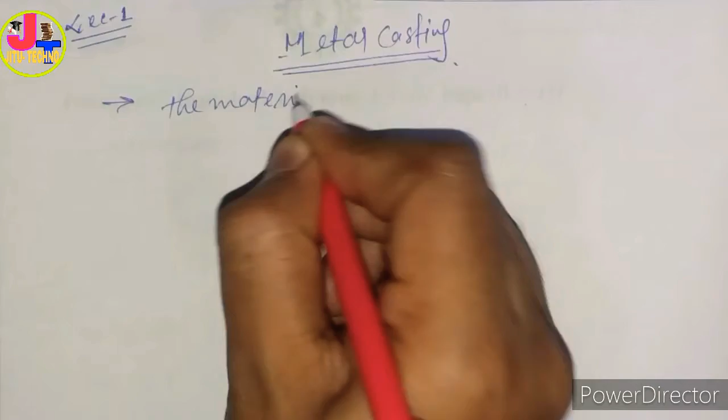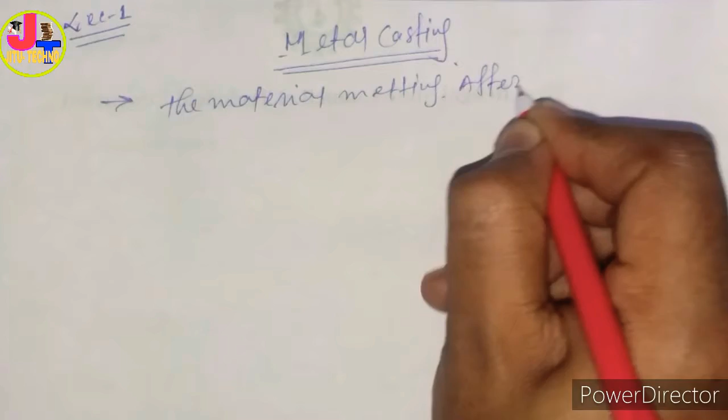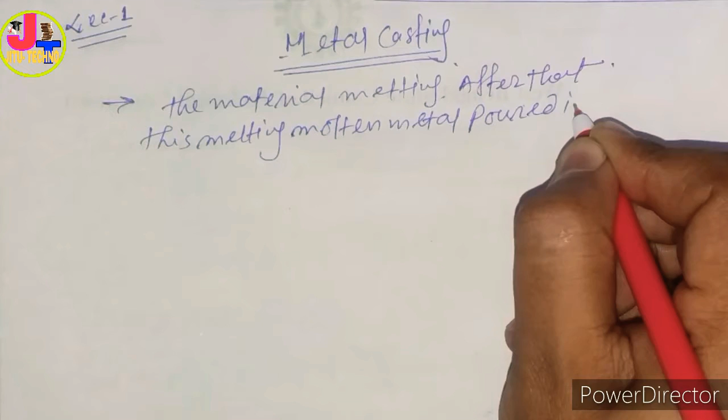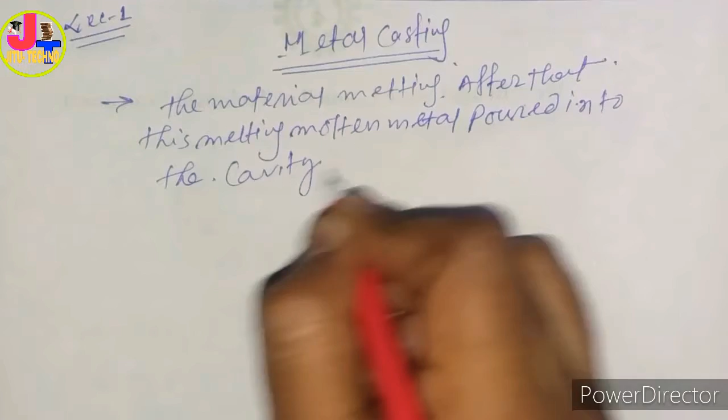First of all, melting the material. After melting, this molten metal is poured into the cavity. Cavity means which cavity? Mold cavity, okay, mold cavity.

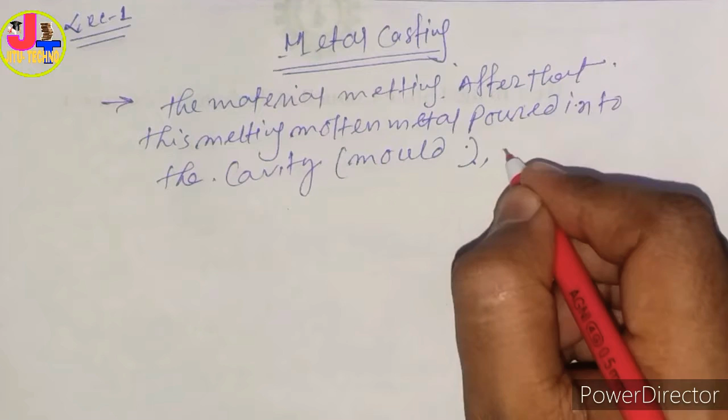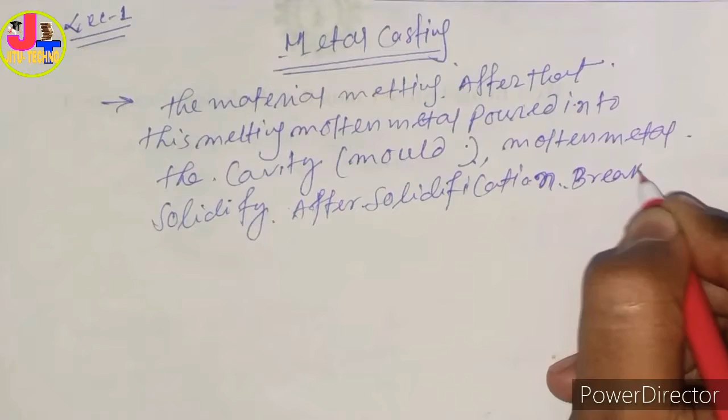Then what will happen? During cooling, this molten metal is going to solidify. After solidification, break the mold and take out the casting.

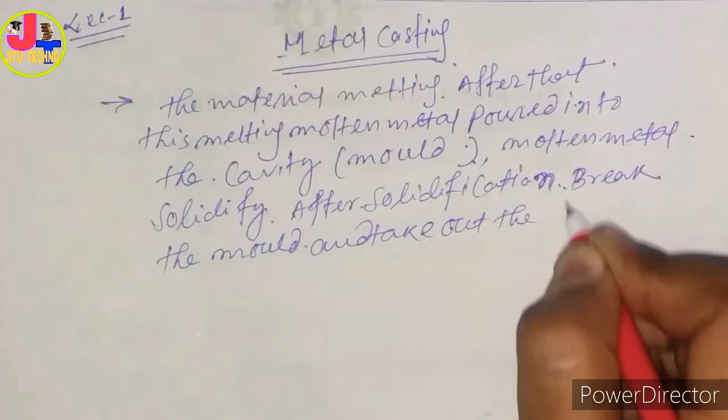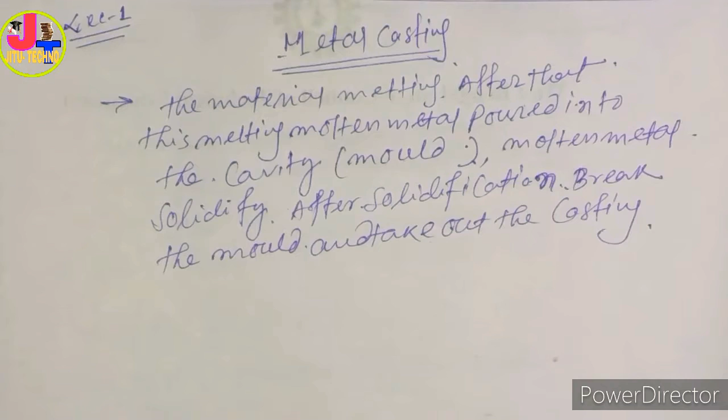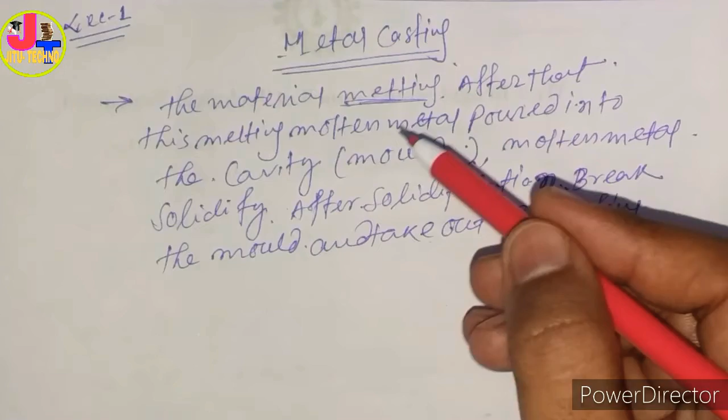So here showing that first of all, whatever material we can take, means metal type of material we can take, means aluminum or ferrous. Then we have to melt it. Then this solid form material, after reaching melting point, is going to molten metal.

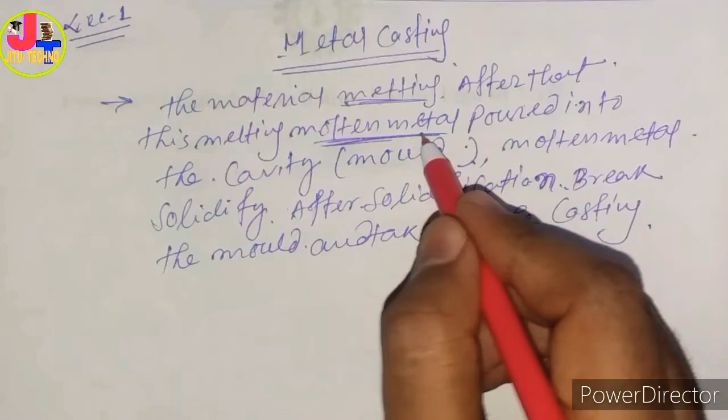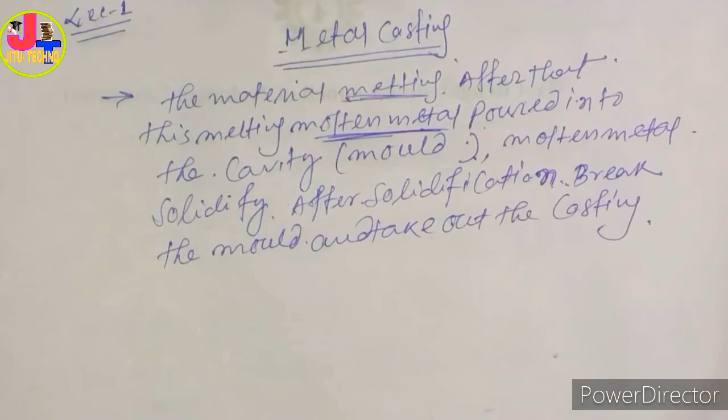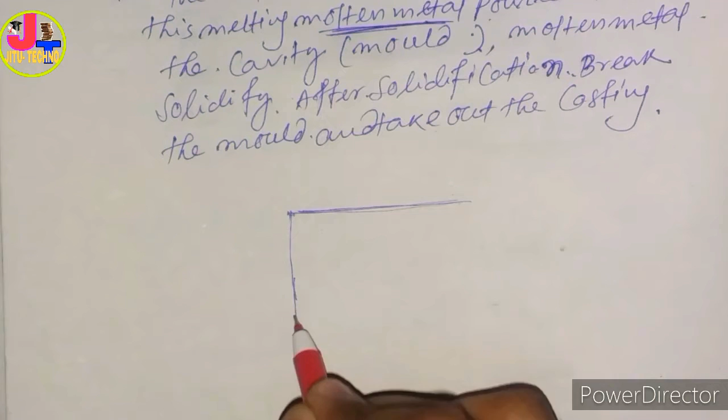First of all, we know that we have to make a cope and drag box. This is the parting line. This is the sprue. This is the runner, ingate. This is the mold.

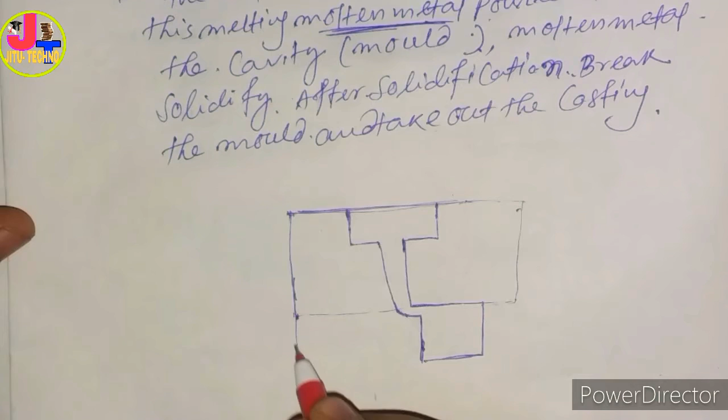So like this, here having sand casting, you can say sand casting, having sand like this. So what will happen here? We seen that it is the cope, upper portion, it is the parting line, is the cope box, it is the drag box. This is the mold casting, this is the mold cavity, you can say.

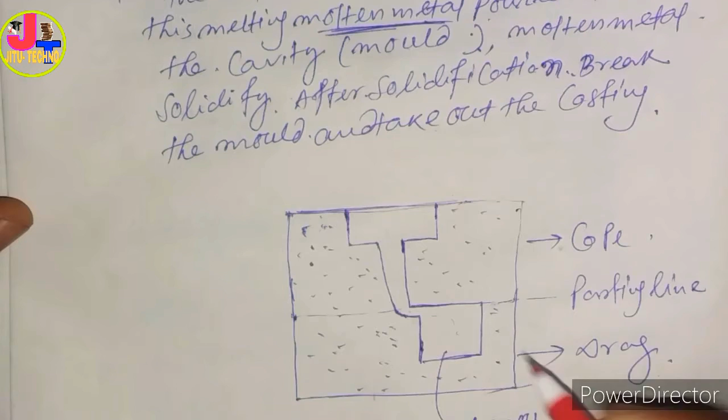Here the molten metal is going to pour due to this sprue, then after that runner, then through ingate, it going into molten metal is coming here. After solidifying this molten metal, we break this mold and we got the casting, mold cavity.

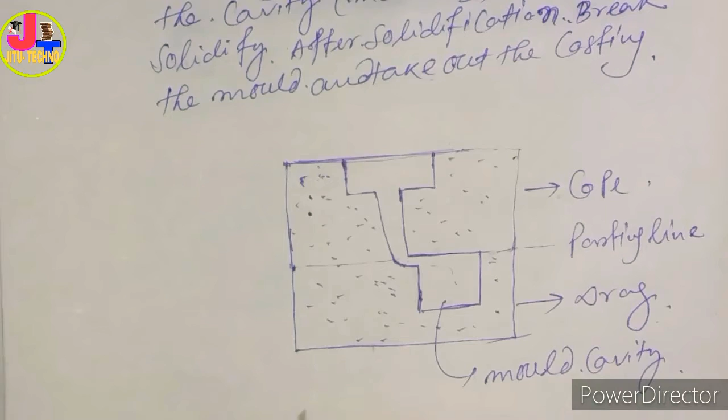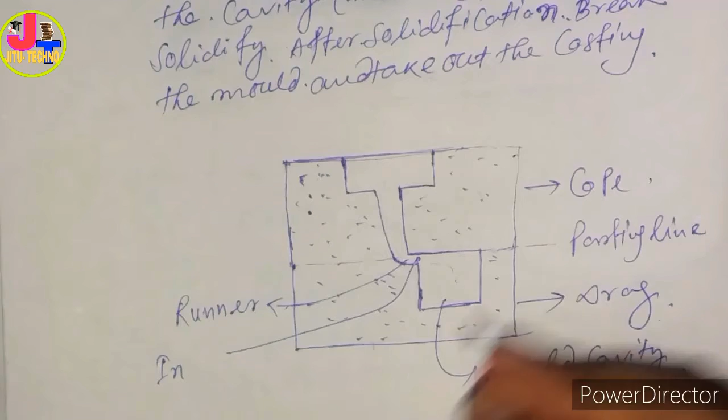And we can say, this is the runner, you can say runner. This is the ingate, means just before entering the ingate. Everything we are discussing, just discussing, but you have to know this figure in a rough way. This is the ingate.

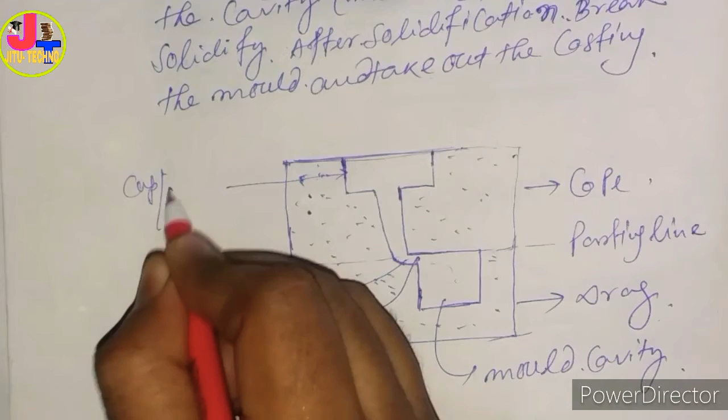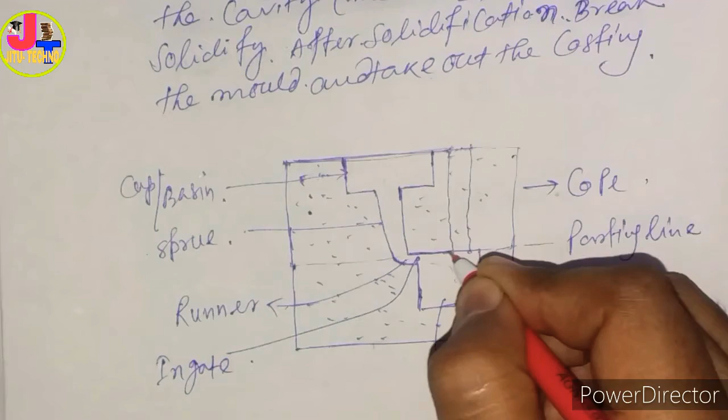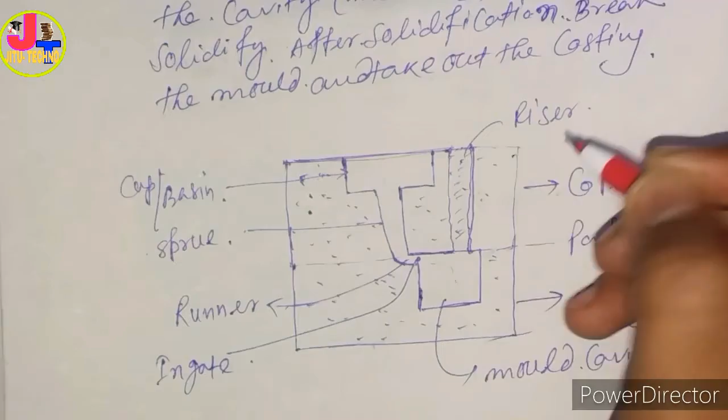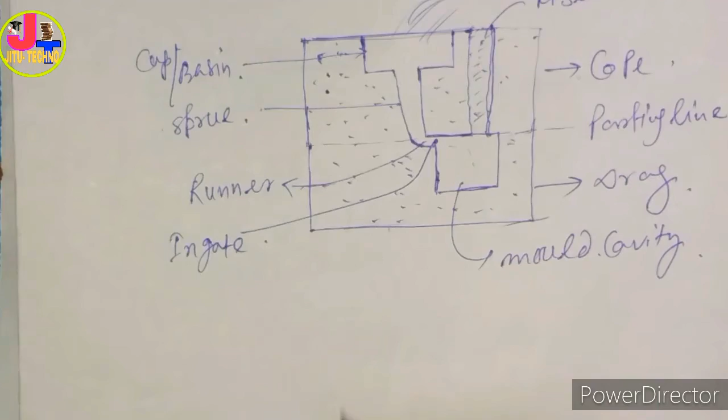It compensates the liquid shrinkage. After this we are discussing about riser. Here we are pouring the molten metal like this. So this is the basic figure of casting.

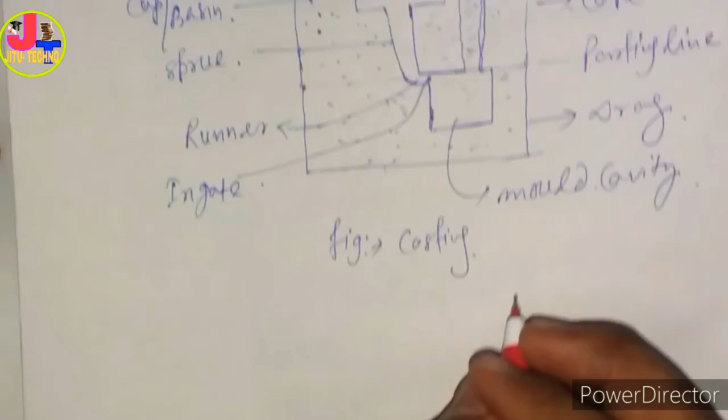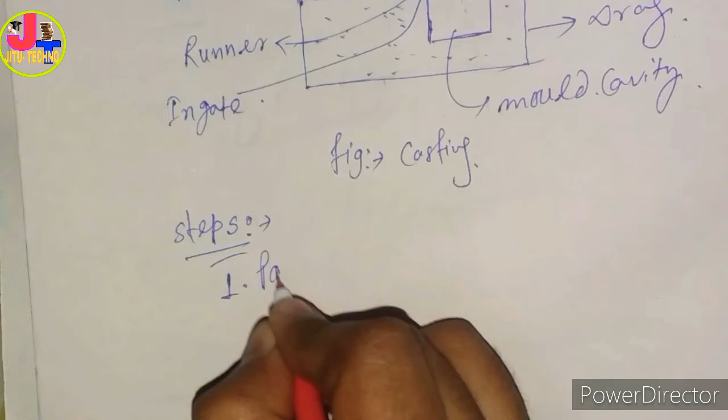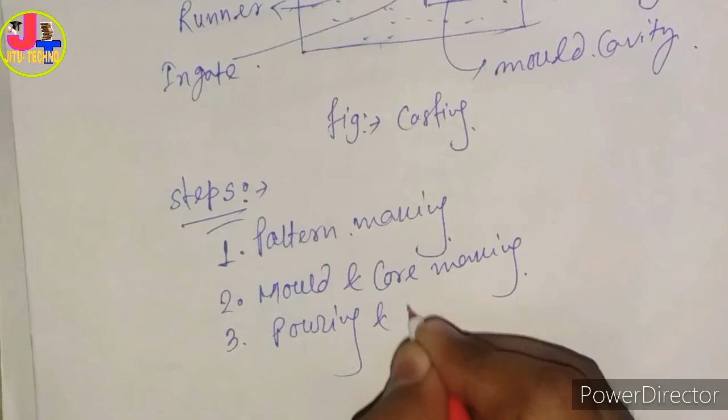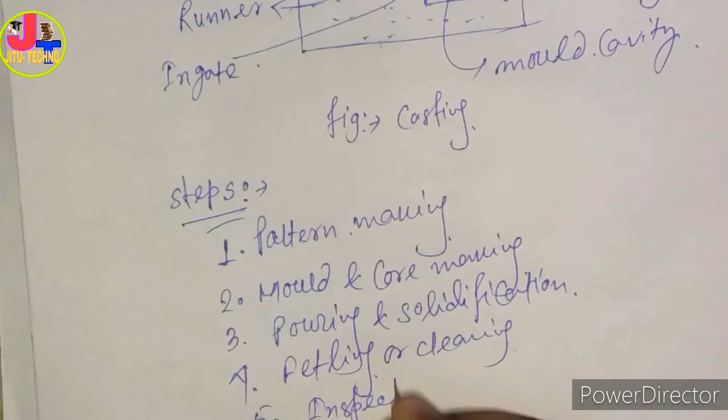Now having steps, so we have to know what is the step in casting. Steps: one is pattern making. Two is going to mold and core making. Three, pouring and solidification. Four, fettling or cleaning. Five is equal to inspection. So these are the steps.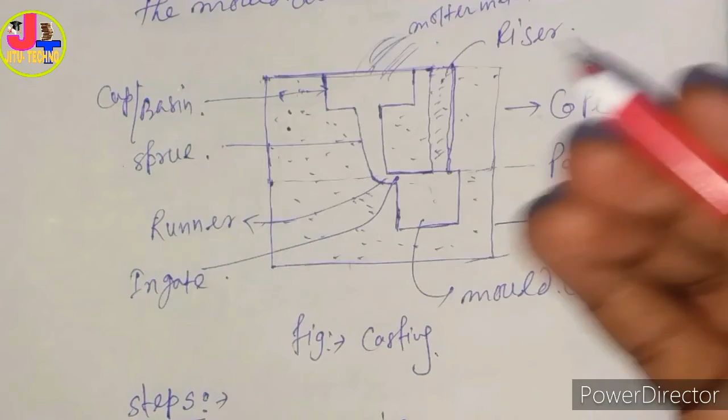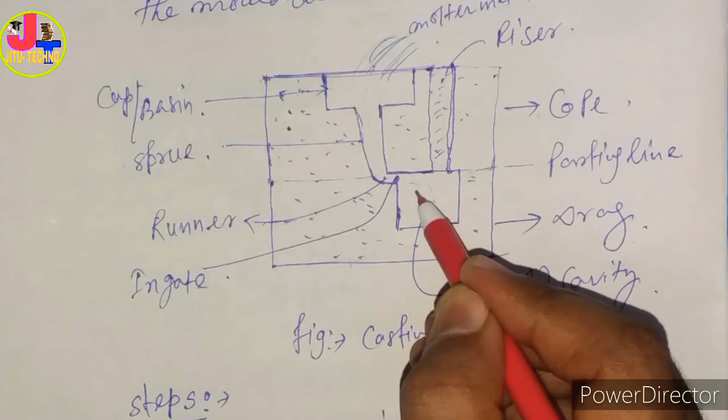So now we are saying that, first of all, you just pour the molten metal. Whatever metal you have taken, you have to melt it, and heat it above melting point temperature, above 150 to 200 degrees. Then you put this molten metal through the basin, then it passes through the sprue, through the runner, through the ingate, coming here. Then after solidification, you break the mold and take the casting. So this is the little bit of introduction.